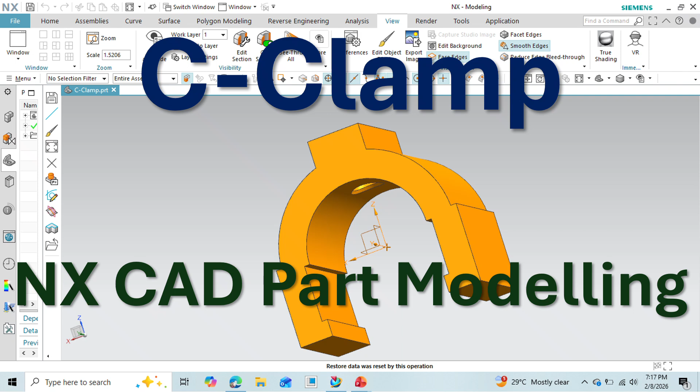Let's design now a C clamp. This part is the last exercise in advanced manufacturing technology for 3D printing. So we are going to create first the 3D modeling, then 3D printing.

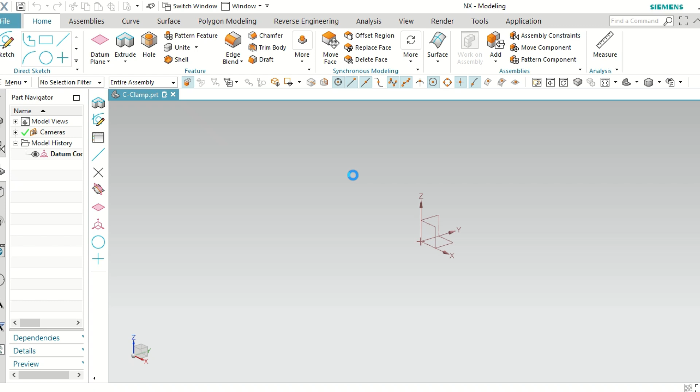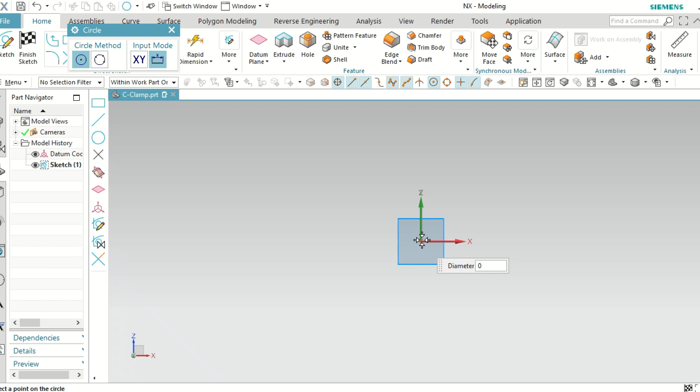First let us create the C clamp in the front plane. For that we are creating the sketch. First, let's start with a circle. The circle diameter here is 22 plus 22, okay, 44 diameter, and another circle with diameter 64.

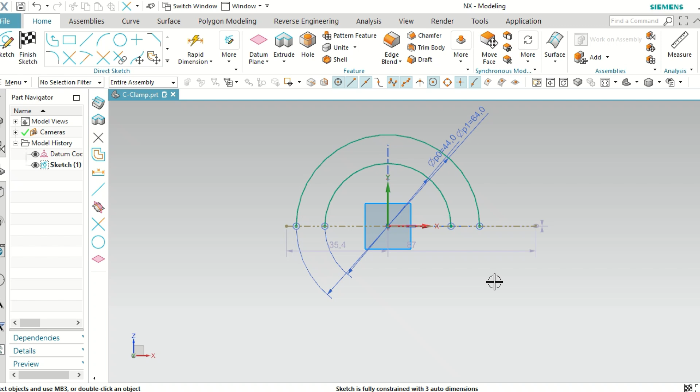Okay, let's draw a line. Let's make this line as a reference only. Quick trim these lines. Let's draw a small rectangle at the top, somewhere like this. Leave it.

And this one, it should be 19 mm. And then it should be 19 divided by 2. 19 divided by 2 is 9.5.

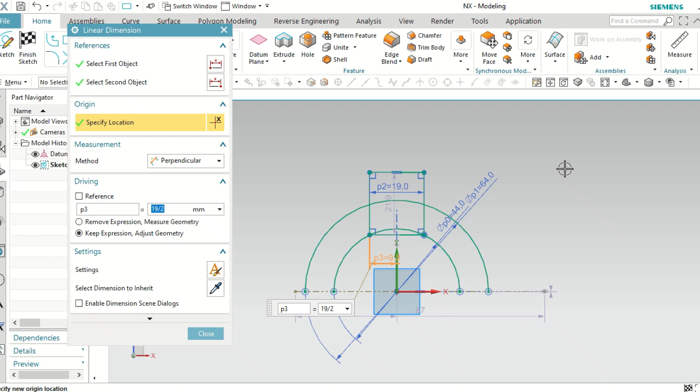And then let's control this dimension later. Let's quick trim it. This, this, and this, and this.

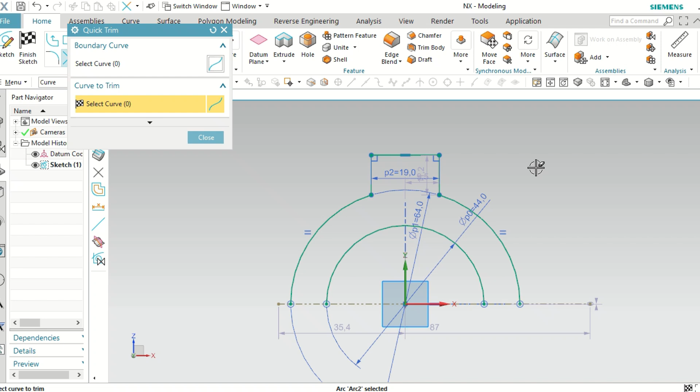Now this one. So we have to be very careful. This one is right, but while doing the picture, only this one, and this one, this one, these two. Let's leave it as it is.

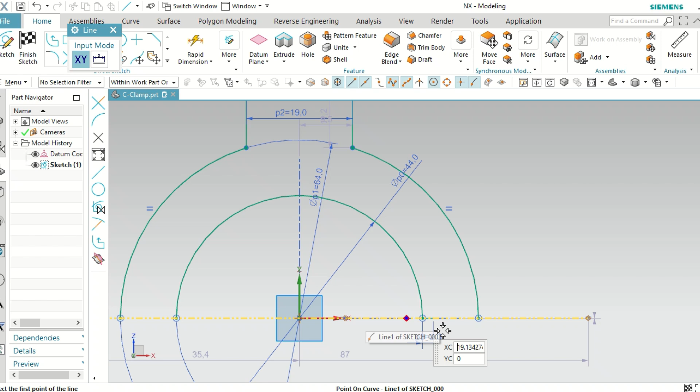Now we have to draw a line from this point. Let's take this point. This is constrained at 2 mm, 0 angle, and from this line end, this end point, down by 20 mm, 20 mm, 270 degrees.

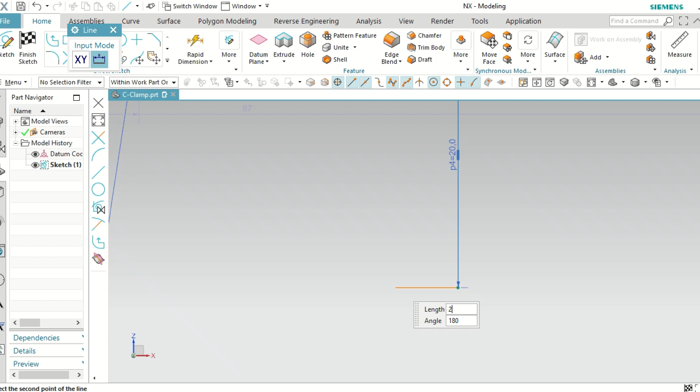And here again a line by 2 mm, 180 degree angle. From here, 6 mm, 270 degrees. Then it goes

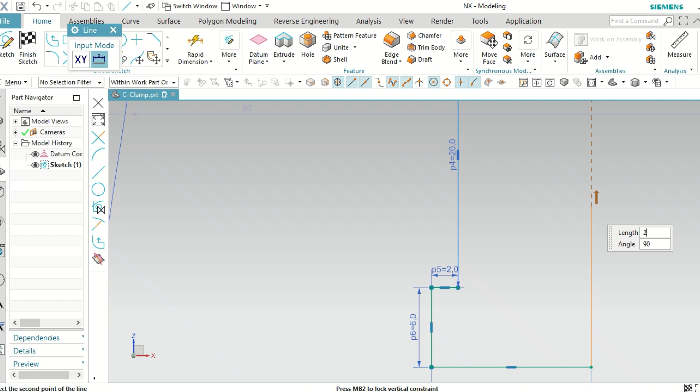From here, it is 12 mm, 0 angle. From here it goes to the end point, it goes 28, 90 degrees. Leave it. Now let's see where it is. From here there is a line. Let's take it like this. Then quick trim these two lines.

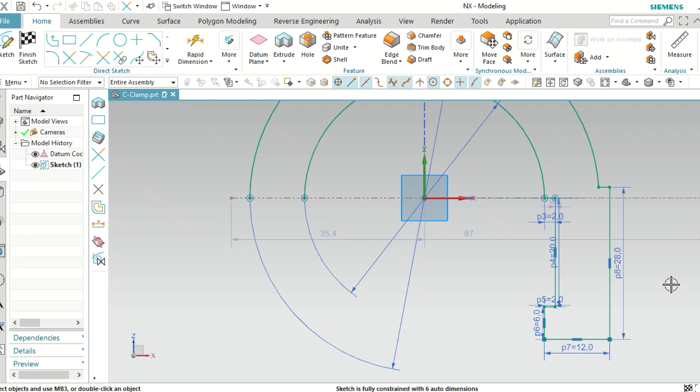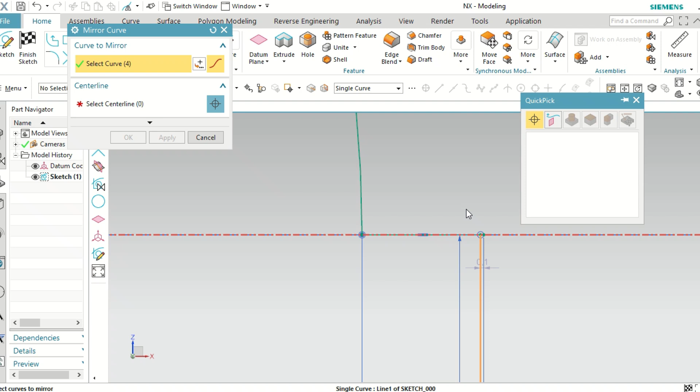Leave it. Now let's mirror this line segment. Mirror this curve, single curve, not connected curve, single curve. This curve, this curve, this curve. Select from the list. And this curve also.

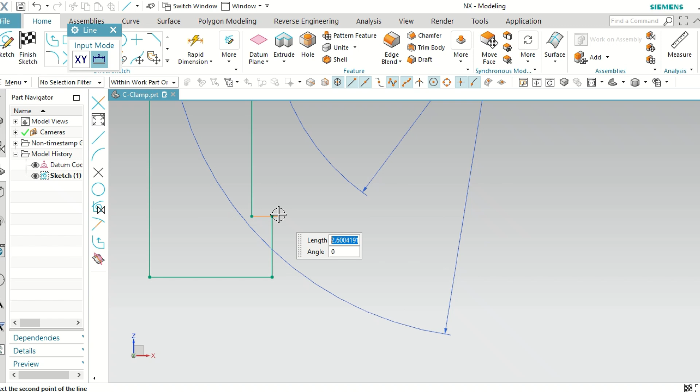Center line now. Center line is this one. Apply. This curve circle. We have not taken one more line. Let's make that line, create that line. Here, trim this. Trim this.

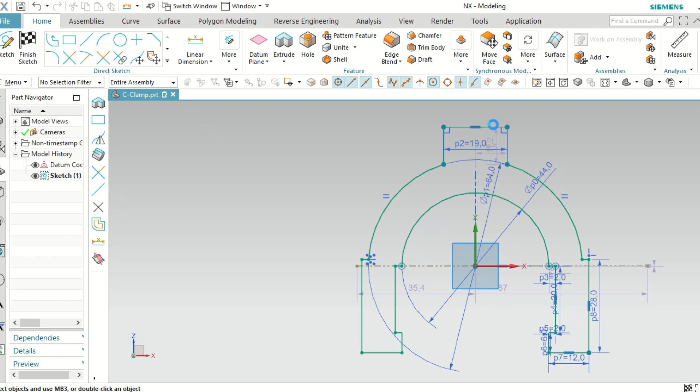And this overall dimension, let's give this dimension from here to this line. There should be 66.

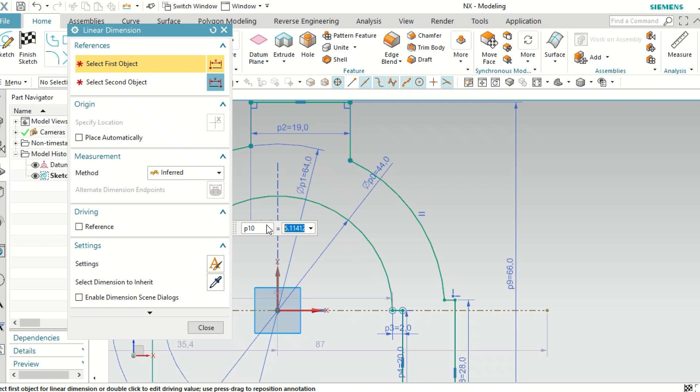Okay, close it. Now everything is fully constrained. There is no issues now, I think. And one more dimension from this line to this point. This line, it should be 9.5.

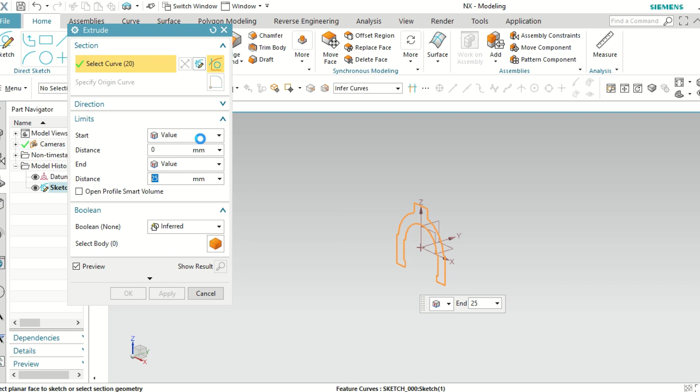Close it. Now it's symmetric. This is what our C clamp. Finish the sketch and extrude it. Extrude it symmetrically. Symmetrical value and 20 mm.

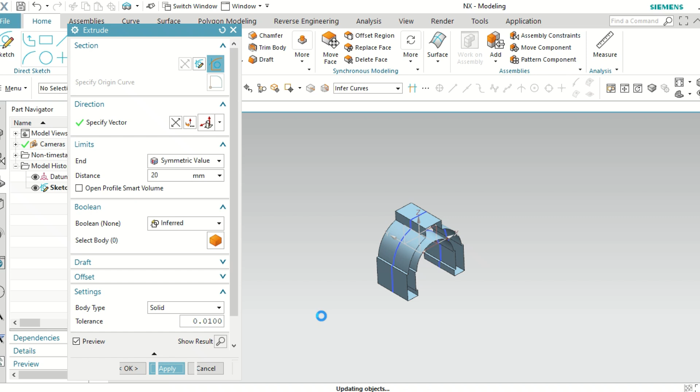But it's now a sheet, it should be solid, right? Apply. Why it's not closing?

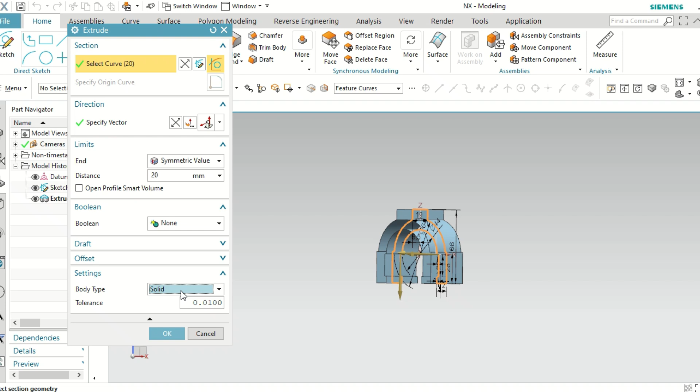Let's say edit with parameters. Solid only. Is there any open outline? We have to check it. It is not open.

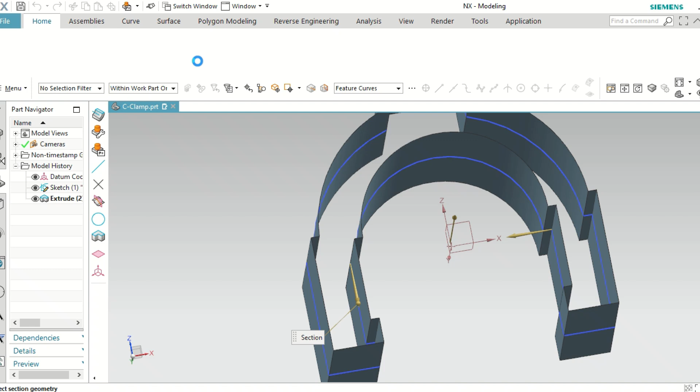We have given solid, but still it's taking as body, but it's still creating a sheet. Why? Because the problem is in the sketch, there may be some open loops.

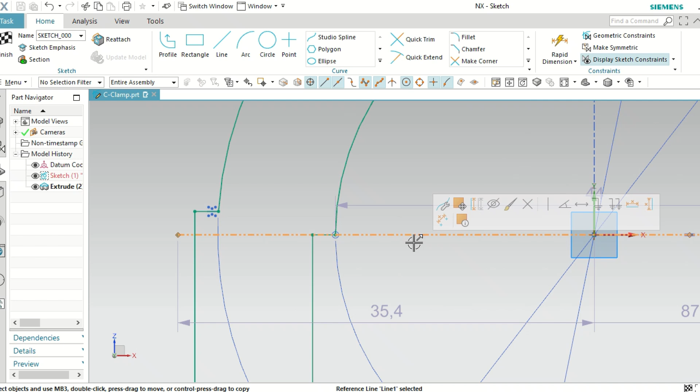Let's edit these sketches. This one is not a problem. This one is a problem. Is there any other? There are so... yes, see, we've taken the wrong place, this to wrong side, I think.

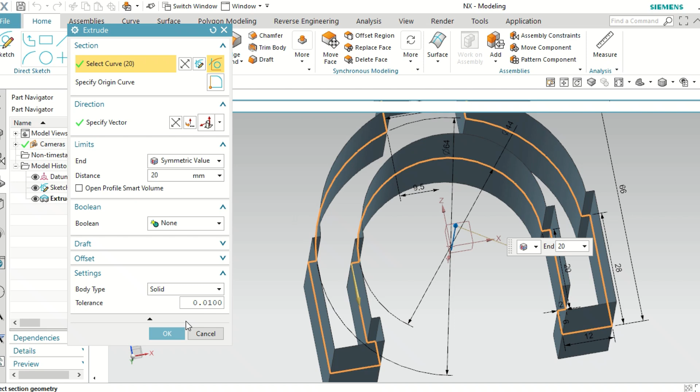Okay, now this is a solid body.